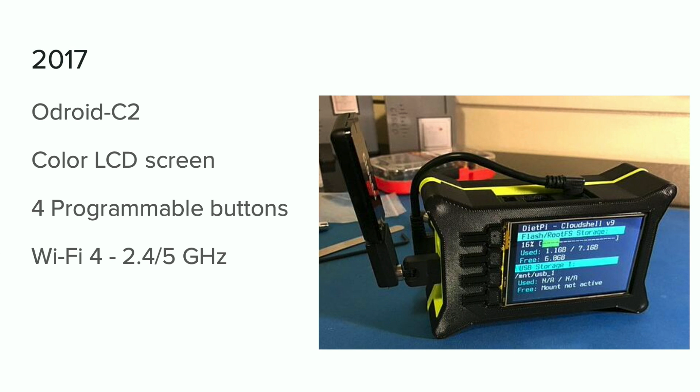So in 2017, we quickly realized not having a display was a big pain point for this type of tool. So we were able to take that same platform but now add a display to it, a colored display with some programmable buttons on there, still rocking the Wi-Fi 4.

And then we go on to 2018, and we move to this Neo 2 platform. Smaller platform, smaller package. Also added the OLED display, which was a nicer display to work with. And the big thing was we were able to add 802.11ac to it at that point.

And then 2019, still stayed on that Neo 2 platform, but evolved it a bit. Joel was able to put together this case design for it that allowed us to house the adapter, the cables, all that kind of stuff into a nice, easy package to travel with.

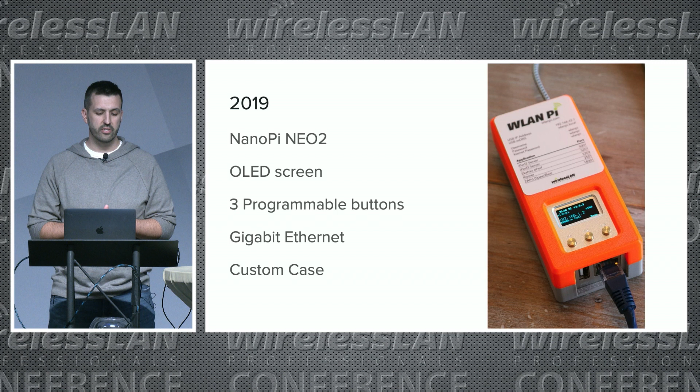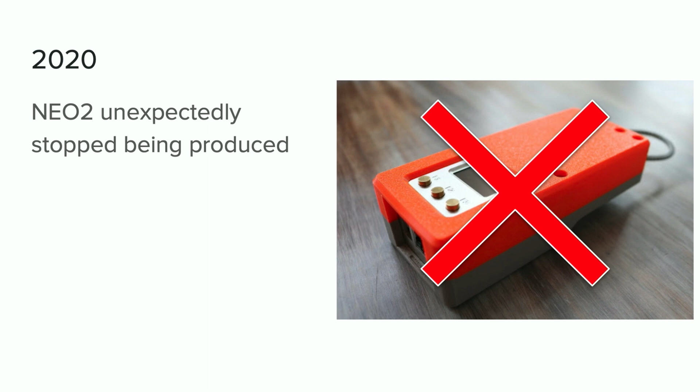Then unfortunately, unexpectedly in 2020, we planned to continue on with the Neo 2 platform, but they stopped producing that platform. And since we were basically just using off-the-shelf parts, that put a bit of a cramp in the project. We had to pivot at that point. We didn't really know, so we had to look at some different options. It was decision time.

So we explored a few different options. The first option: is this the end of the project? Do we close up shop here? It sounded pretty nice at the time, since it's been a lot of nights and weekends and things like that contributed to the project. So there was certainly an appeal to that, but I think that myself and the core contributors involved in this project wouldn't allow it.

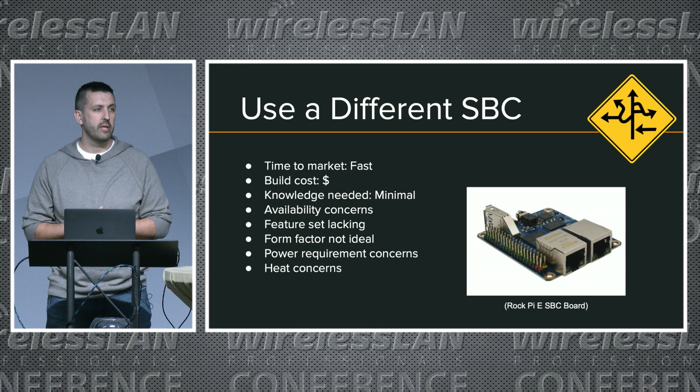They wanted to continue on. They were ready to face the next big task. So we looked at a bunch of different single board computers. I've got a pile of these things collecting at my house, as I'm sure a lot of you guys do. We looked pretty seriously at something like a Rock Pi E, and it met a lot of the requirements, but the concerns were a lot to do with availability. Is this just going to be another thing where we pivot to this, do all the development work to get an image on there, and then it just disappears on us?

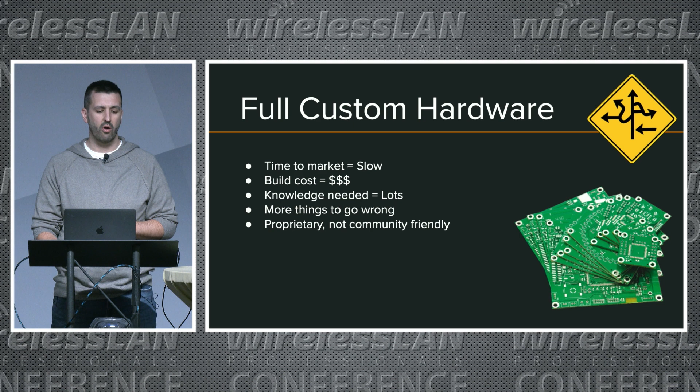So then we looked at full custom hardware. That certainly is appealing, it would give us the greatest amount of flexibility. However, there was a time constraint. Knowing things like WLPC, there was a demand for the previous generation hardware, so we wanted to try to get something to you guys as quickly as we could. Also there's a cost and complexity standpoint, things like that are all part of that. So we didn't end up going that route, but what we actually found in the process was a possible hybrid solution.

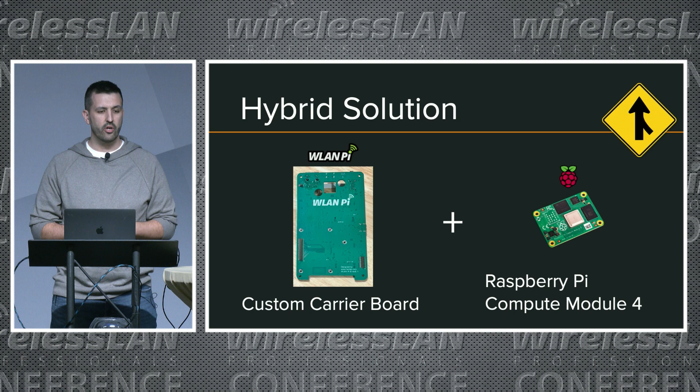I don't know how many of you guys are familiar with carrier boards. This was a new concept to me, but working with carrier boards was pretty interesting. Carrier boards bridge that gap where it allows us to build something much faster, in the sense that it takes a lot of the complex pieces of the components, your CPU, your memory, that whole architecture, and puts that into a single component - a compute module. So basically the brains of it is a standardized component, and then we're building the carrier board that mates with that pair together. So that allows us to lower that difficulty level of developing this, but also speeds things up from a time to market standpoint.

Since it's still custom manufacturing of circuit boards, there is still a significant cost and time associated with that, but at least it does lower the barrier compared to a full custom solution. The other thing that I really liked about the compute module side of it, the Raspberry Pi Compute Module 4, is that this is meant to be an industrial type solution that's going to be around a while. They actually have guaranteed that it's going to be in production until at least 2028. So that was also another big selling point to us - if we're going to embrace this, it's going to be around a while and we're not going to have to pivot to something else in a year or two.

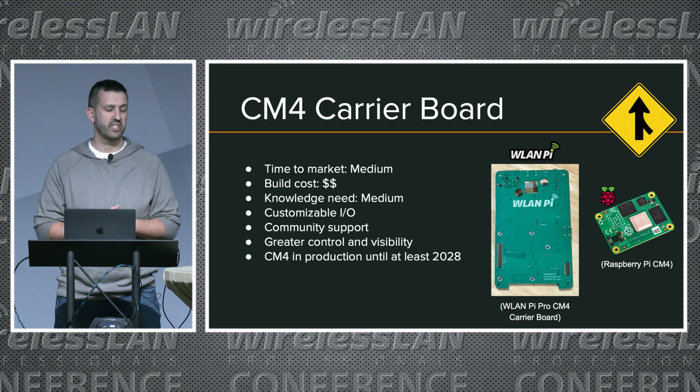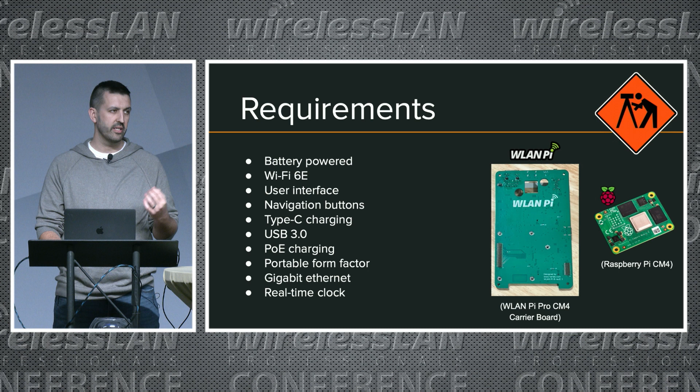So we laid out our requirements. We looked at the previous solution that had some shortcomings, and as technology was evolving, it was becoming more apparent - not having things like USB 3, not having any kind of PCIe, we couldn't utilize the latest technology that we needed for Wi-Fi professionals. It also didn't have a battery, so you had to connect external power to it, things like that. So these were the requirements that we came up with, and a lot of these came from conversations with users - oh, it'd be awesome if it had this. So we just compiled that list of what the users were asking for.

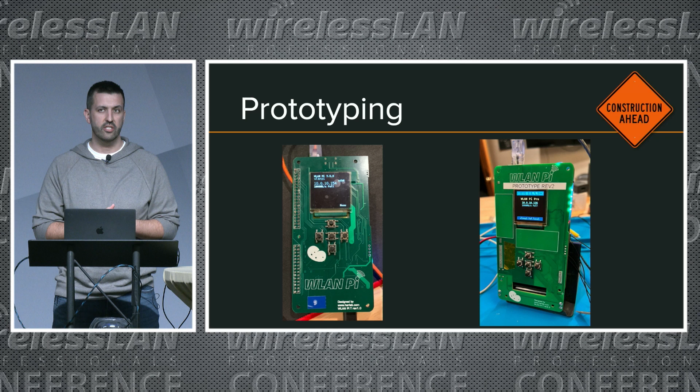So then the next phase was, after we defined those requirements, we moved on to creating some prototypes to see if we could actually create something that could potentially fill those requirements. So we went through a prototyping phase, then we went to production, and then we got into the fun of assembly. And this is what my office looked like just before WLPC. Thankfully, some hands that got in early also helped us assemble - you can see the picture on the right there. Those are the completed units for the deep dive that's going to be happening later today.

And fast forward one year later from the time when we decided at that decision point - okay, we need to do something here, we don't want to let this project die - one year later, this is what we came up with.

That's all you guys wanted to hear, right? We don't need to go into any details or anything.

So let's get into some of the geeky pieces of it. What are some of the features of the WLAN Pi Pro? Some of the features include using it as a packet capture device, network performance testing endpoint. It could become a portable DHCP, TFTP, SFTP server, Wi-Fi scanner sensor, portable AP. The list goes on - you can see there's a lot of different options there.

One thing I want to point out is the last point there, around being an open, non-proprietary platform. I think that's very unique to this project and something I really like, in the sense that we have a lot of awesome developers, even in the room here, that I've had the opportunity to work with. They don't have the ability to develop custom hardware like this, and for their specific tool it doesn't make sense for them to go out and do that. So I think it's really cool that we can develop hardware like this that enables these software developers to write some really cool apps for your phone, your laptop, web-based things like that can take advantage of this tool.

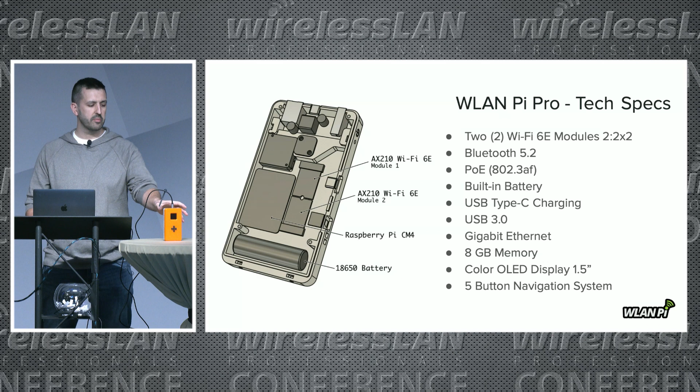Also with the Bluetooth, I could technically pull the cable out and just run it off battery as well. But yeah - USB 3.0, gigabit Ethernet, 8 gigs of RAM, color OLED display, twice the size display as the Neo 2 had, and we added some extra buttons versus the 3-button solution on the Neo 2.

You can see all the ports, the layout, and everything here. This is pretty much the same kind of view, but you can see from the side what that looks like as far as where everything's located.

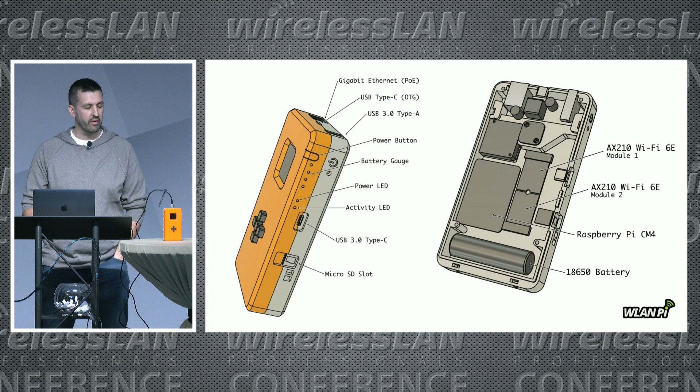So that brings us to - we've got the hardware we talked about, but we also had to change the software as well. This is a completely different platform than we were on; it's a big shift from the Armbian-based solution we were using before with the Neo 2. Now we're putting in a Raspberry Pi Compute Module 4, and the cool thing is that by moving to this method we've now separated out our hardware, WLAN Pi Pro, from our software, WLAN Pi OS. WLAN Pi OS is built on Raspberry Pi OS.

If you're familiar with Raspberry Pi OS, we've essentially built our tool set on top of it. That means if you're already using Raspberry Pi OS in your environments, you know what packages and things are available - all those same packages are available to you now on this platform as well, in addition to all of our custom tooling. It's an open source platform, community supported, and compatible with all your existing Raspberry Pi hardware you probably already own - Raspberry Pi 4, Raspberry Pi 3.

Basically, as long as it supports running a 64-bit operating system, you'll be able to run the WLAN Pi OS on that same hardware. So there's still the DIY component to this, right?

That leads us to the Community Edition, which allows you to still do that DIY part of it. So I've highlighted in the bullet point list some of the differences between the WLAN Pi Pro and what its capabilities are out of the box versus if you're standing up a Raspberry Pi 4. You can see what functionality you'll have and what you won't have if you're running the Community Edition, as we're calling it.

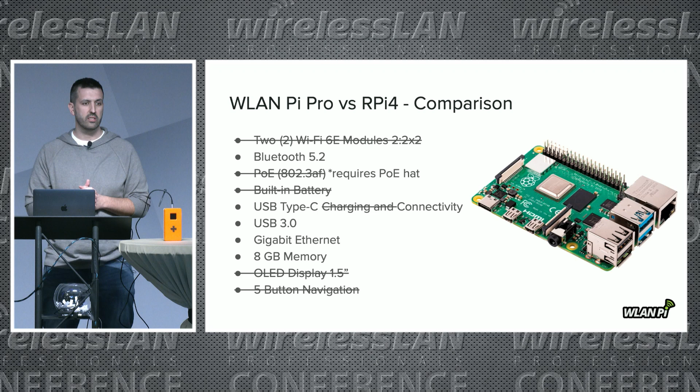So if we continue on that path of comparison, you can see hardware-wise some of the differences of what's included in the WLAN Pi Pro versus the Raspberry Pi 4. The ones that I've crossed out there aren't going to be available either at all, or at least out of the box, on a Raspberry Pi 4 that are already built into your WLAN Pi Pro. And of course, we've got some new tools in the process as well.

I want to highlight again this open, non-proprietary platform that allows developers to write their code to run on the WLAN Pi and take advantage of all the hardware that we packed into here. Some vendors have already created tools, or are in the process of developing tools, that are going to take advantage of that technology.

We put a new dashboard, rewrote the whole front end. Josh put a huge effort into this and has done some amazing work on rewriting this front end. It's built on this extensible framework using Flask.

We also have an admin interface that we've added using the Cockpit project, which allows you to put a web-based admin system on there. One thing that's really slick about this is if you have a bunch of WLAN Pis, you can log into a single Cockpit instance and add all of your WLAN Pis to it, so you can manage all of them from a single dashboard.

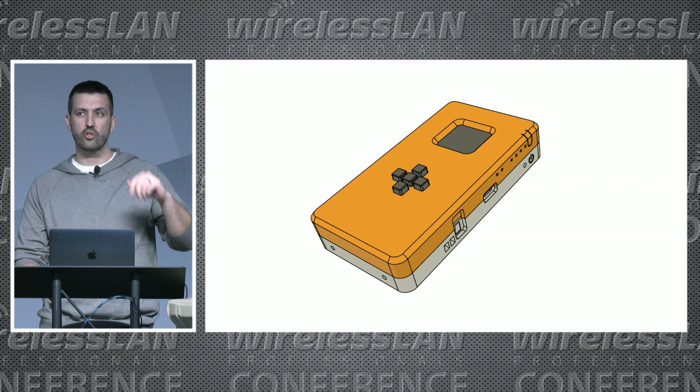Question over here? Profiler is not available on 6 yet. I'm not sure yet if we're going to be able to. 6 gigahertz has some extra restrictions at this point, at least with transmission and that kind of stuff, that we're not able to overcome. However, we're hopeful that we can, at least through profiling a device on 5 gigahertz, be able to get it to tell us information about its 6 gigahertz capabilities as well. We can still use Profiler to do 6 gigahertz association captures and parse out that information. If you had, let's say, a 6 gigahertz AP, you could capture that association request that the client would send to the AP. We can put the Profiler in that mode as well to just capture all association requests or to capture for a specific SSID.

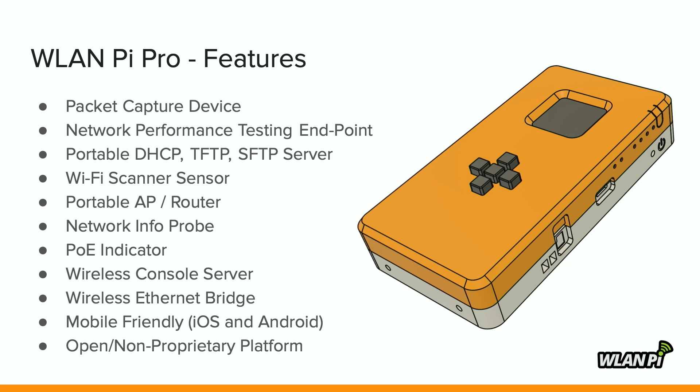Sure. Go back. You wanted the features, this one? This feature list or the hardware? And this was the tech specs.

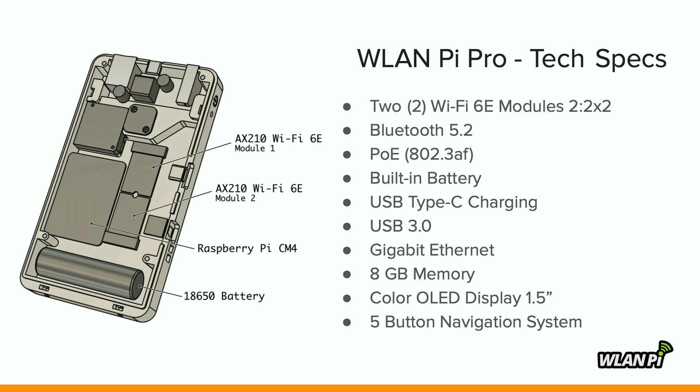Mobile friendly. So the question was, what do I mean by mobile friendly? With the previous WLAN Pi, we couldn't connect it to an iPhone. The problem was the power it required, and that was one of the benefits of putting the battery in there. Now that the device has its own power source, we can connect it directly into an iPhone, either over USB or over Bluetooth.

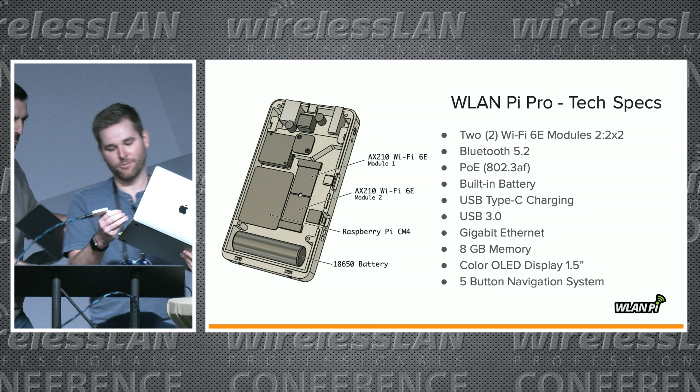All right, well, Joel has some stuff to share on the case design side of it with Nick as well. I just tagged along. It's fine, Nick's here for moral support. No, Nick was a big contributor to this, so he definitely has a lot to talk about. We collaborated heavily on this design. Thanks, Jerry, thank you. All right, while Nick is getting all that squared away, sorry for the delay.

My name is Joel, this is Nick, and we collaborated in designing the case. At the end of the day, for the actual design that got printed, I probably pushed the buttons that made the design, but Nick was super involved in feedback and testing designs, and he also printed about half of the cases, so it was really nice to double our efforts. Working on a team is great to resolve problems, so super duper valuable.

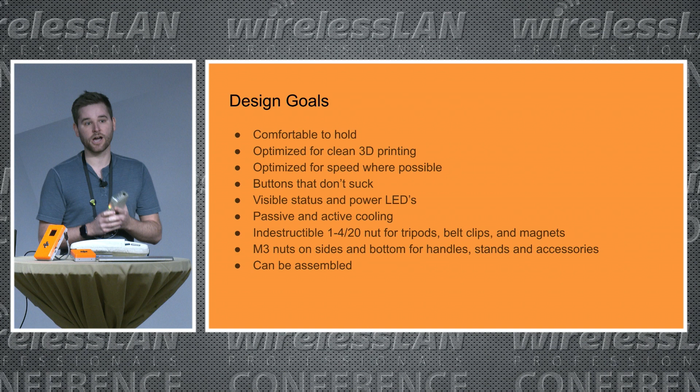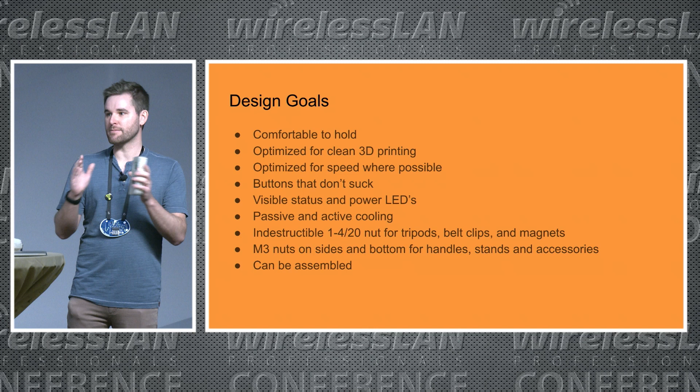Just like Jerry talked about requirements, we had some requirements for the case. One is we wanted it comfortable to hold, feel good in the hand, since we see it as a handheld tool. We also wanted it optimized for 3D printing, since we needed to print tons of these things as fast as possible. There are certain design ideas and parts that are easy to print and others that just don't print well. Every manufacturing type has a certain set of limitations you have to operate in, and 3D printing is no exception. We also wanted to optimize it to be fast to print, to get this thing printed as quickly as possible.

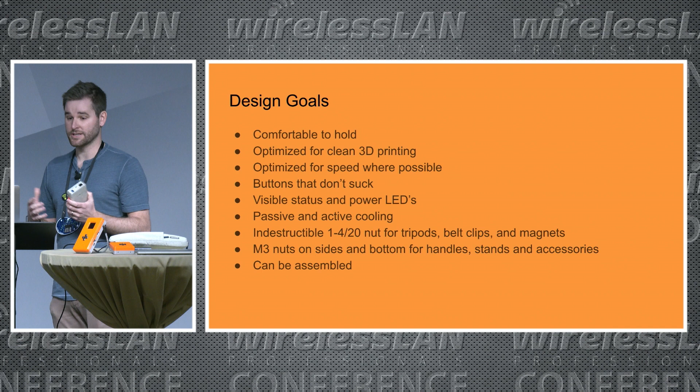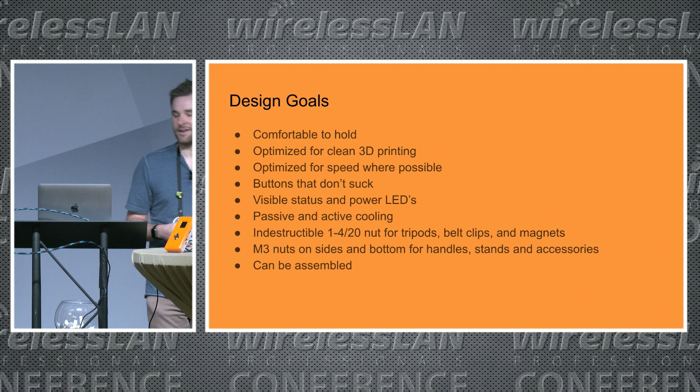Nick, how long ago did we start actually printing production cases? Well, as hinted by Jerry, with the hardware, we didn't get hold of final production hardware until January, early-mid January. I got a sample, you got a sample, and that's what we had. That really bit us down the road because we found out there's some variance and tolerances, like the height of the buttons was different on a bunch of the production units. Oh man, there's all kinds of stuff like that we learned along the way.

Another requirement, speaking of buttons, is we wanted buttons that didn't suck. This was one of the hardest things to do, especially with 3D printing, because it's not very exact. We also got locked in early on our button design because we had to tell our hardware supplier what kind of buttons we wanted, and we found out pretty late in the game that we chose poorly—or rather, there was wiggle room for improvement. Wow, man, you should go into marketing or something.

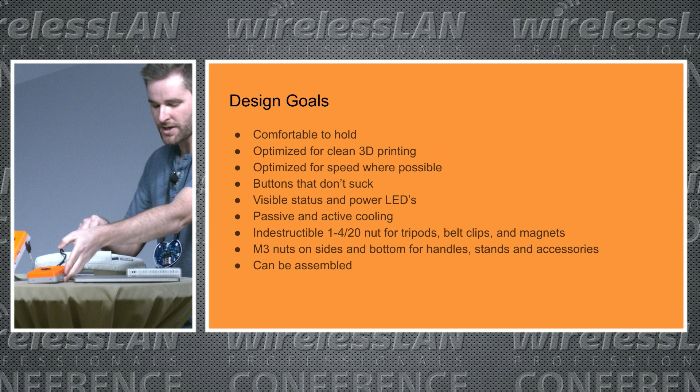Also, we wanted visible status and power LEDs, so there's a heartbeat and a power indicator. These come directly from the Raspberry Pi. There are also battery indicators along here—you can see on Jerry's unit, the battery indicators are kind of glowing. From a distance it looks like it's on fire. It's really nice. There's also an LED above the PoE or Ethernet port, so if you plug PoE in, you get a nice indicator showing you've got power from PoE. So that's nice.

We also had to do cooling. This thing generates some heat - it's got a Raspberry Pi 4 compute module inside, so there's going to be some heat involved. Also the PoE circuitry generates quite a bit of heat. So we added cooling vents and things like that to meet those requirements.

Also, this is a big one, and Nick, you pushed pretty hard for this, as did Jerry. Do you want to talk about the thing that you wanted? Oh, the mounting. Yeah, which one was it again? It was right here. Okay, yeah.

One of the strict requirements from Jerry was that it must have a 1/4-inch thread. We later discovered that the original WLAN Pi case, in the M3 bolt recesses, Jerry had managed to crank a 1/4-inch into those. So accidentally, the V1 design actually would house a 1/4-inch accessory - but it could only do it one time for each unit.

So the requirement for this case was it must have a 1/4-inch thread somewhere on it. And of course, we're all collaborating on this, trying to work to timelines, and decisions get made, and then Joel is stuck with the question of where do we put it on the case, because it's not smack you in the face obvious.

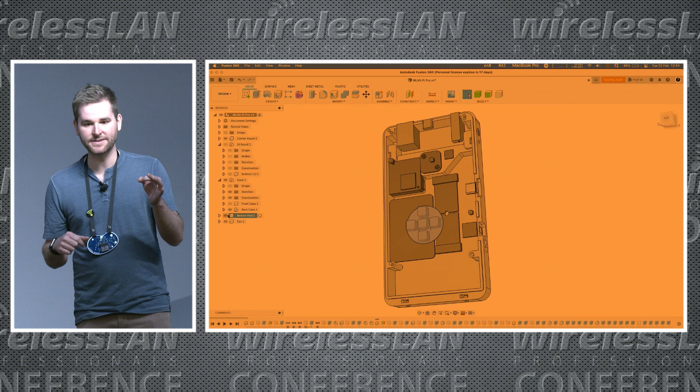Do you want to just show where the nut is in there? So what we did is these are just off-the-shelf 1/4-20 nuts - I apologize if they're 1/4-20, I wish we could have done everything metric, but the standard is imperial for this. So basically what we did is we did a recess inside the case that the nut press fits into.

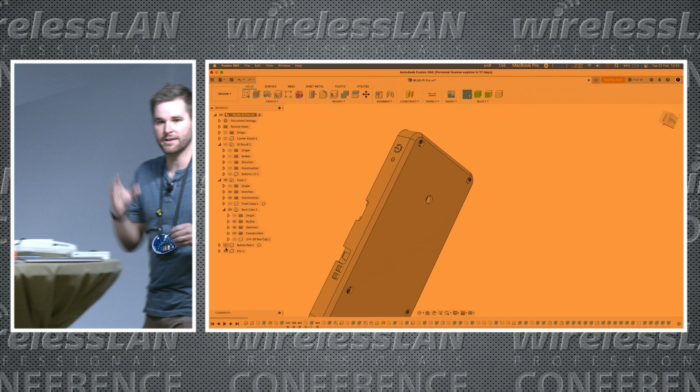One of the requirements was I wanted this to be indestructible - I wanted you to be able to tear the case apart before the nut or where the nut sits fails. Additionally, as you tighten up like a tripod or a belt clip, Jerry's got one - that's where the nut is, and he's got what looks like a holster accessory on here. As you tighten that up, it pulls the nut against the back of the case, so you really can go as tight as you want. It really should not fail unless you stick an impact driver on it or something like that.

Then it might fail, I don't know. Please don't try, I don't want to print another one for you. I guess you could - I probably would print another one for you, actually.

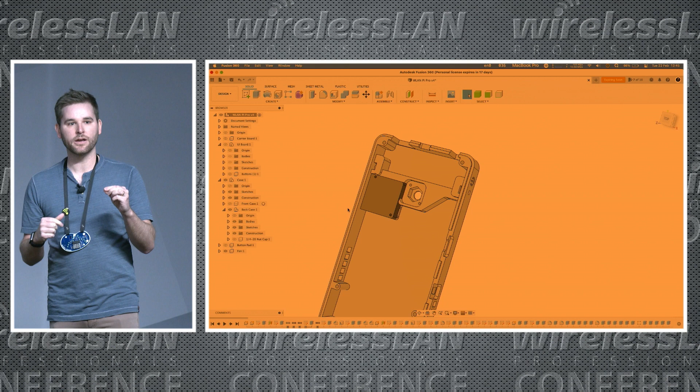Another challenge we ran into is how do you capture the nut in there? One thing you can do with 3D printing is print up to a certain height and tell the printer to pause, and it moves the print head out of the way. Then you can put the part in there - a nut, a magnet, whatever - and tell the printer to start running again, and it goes back over and fills in on top, trapping it inside. The problem is now you start a print, wait 2 hours, the printer starts beeping at you at 1 a.m., and you have to go in, put the nut in, hit print, make sure everything's good again. We didn't want to mess with that.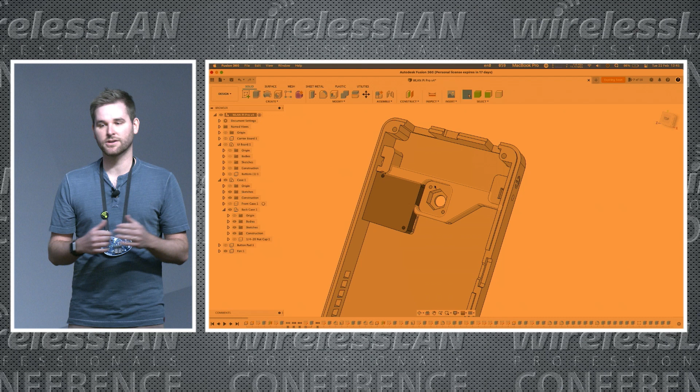So what we decided to do is build this spot where the nut would press fit in, and then there's a cap that goes on top with 2 little M2 screws that go in on each side to hold it together.

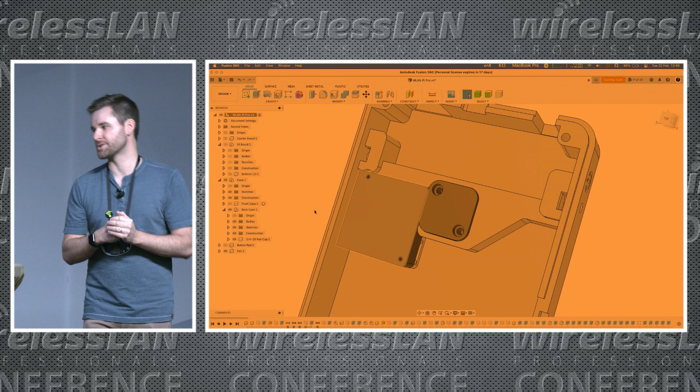I don't think it's going anywhere. I don't think you're going to be able to break it. I don't know, it really should be super duper strong. So, but that enabled us to also...

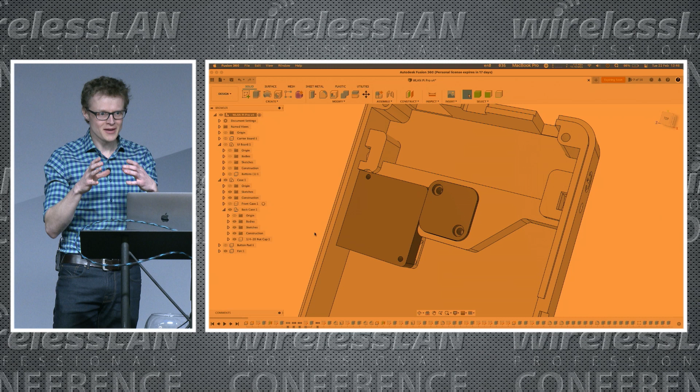The tolerance here, it's not correct that the nut should rattle inside this housing. We were unable to guarantee that we would get the same 1/4-inch nuts. Even in the UK they do sell 1/4-inch threads, but instead of risking that, we just printed these ones out, and Joel was able to supply us with the 1/4-20 nuts, American made, well, probably not American made.

So could we go back to the slides? Yes, I don't know how the gesture to get back to it. Okay, rad, oh, and let's go to materials.

Okay, so we had to decide which material to use. We basically have two options, we can go with either PLA or PETG. Some people call it PETG. There's some pros and cons to each one, but here are the highlights.

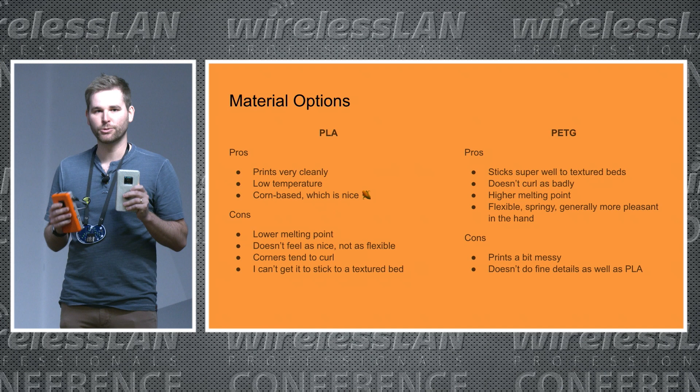PLA prints cleaner, this is PLA. It's a special edition I made just for me, with a broken screen by the way, that's kind of fun. Some of the screens, unfortunately, had a couple of bad screens in the factory, and I managed to receive one of those. PLA prints really clean, very sharp, the layers stack up really nice, it just looks really good. But the problem is it feels kind of tough, it doesn't feel springy, it feels a bit more rough in the hand.

So we decided to go with PETG instead. Another thing I like about PETG is it stands up to heat better. You can leave this in a hot car - I mean, I wouldn't do it because of the battery in there, I try not to leave stuff in a car on a hot day - but if you did accidentally leave it in a pretty hot environment, it's not going to deform or warp, whereas PLA absolutely can, and I've seen it happen multiple times. You really have to use PETG in circumstances like that.

Additionally, when you're printing a part, adhesion to the bed is really important. As the part cools it tends to contract and warp up. In fact, if you look very closely, every now and then you might see a little corner where it peeled up just a teeny tiny bit - it's just a side effect of printing. PETG doesn't suffer from that like PLA does. Last thing that's nice about PETG is you get that nice textured surface, I think everybody enjoys that look, and that's part of why we went with PETG.

I think it's important to talk about what we used to model this up. For the last WLAN Pi case, I used a tool called SketchUp, a Google project that got spun out into Trimble or something like that. The problem with that tool is that it's what's known as a surface modeler, designed for making a surface of polygons. That does not work well for 3D printing, and it also doesn't have any kind of parameter control.

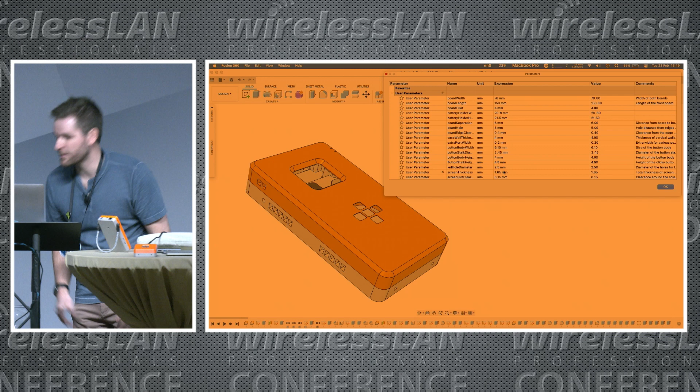What parametric means is you build the model with parameters. You say, okay, here's an object, I'm going to go out from that object by 10 millimeters - you've done it with a parameter. What's great about that is if you define a tolerance around a part, an empty space, something like that, it's a matter of going in and saying, change that from 1 millimeter to 2 millimeters, and the part just changes. So let's change the board length - let's say the WLAN Pi board was not 150 millimeters long, but 200 millimeters long. I just changed the parameter, and now Nick's MacBook is working super hard to do a whole bunch of math, and now we have a super long Pi.

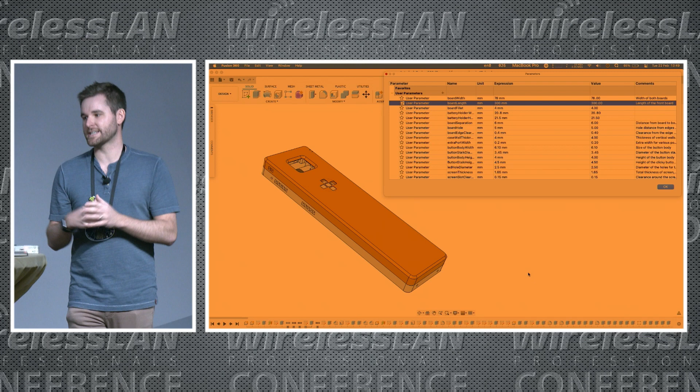While that is a goofy example, this is super powerful because it allows us to go in and make small incremental changes and tune the size and all kinds of different things in regards to the model. So I think we can go back to slides.

Did you not have 3-finger? Is that all right? I think it's kind of cool. I think we should keep it.

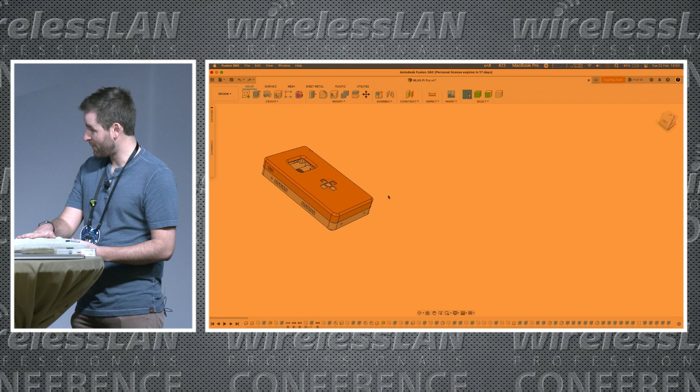Now, while you're doing that, I think I'll introduce the other WLAN Pi. We've just got a reveal. So, Jerry's WLAN Pi, this is pretty cool, but sometimes I think we should think bigger, right? And so what we decided to do is make one that is literally bigger. I'd like to introduce to you the WLAN Pi Pro Max.

All the work that we did on the case, that's what got applause. That's what worked. So, all right, good to know. Okay.

Should we go through... I think that's enough on the things that we did. Let's talk about the case and how it goes together. Yeah, you mind if I just take Fusion and do that?

Okay. My dock's on the left. Oh, it's on the left. Yeah, ooh, and they're tiny. Okay, all right, let's see if I can figure out all of Nick's settings and things for Fusion.

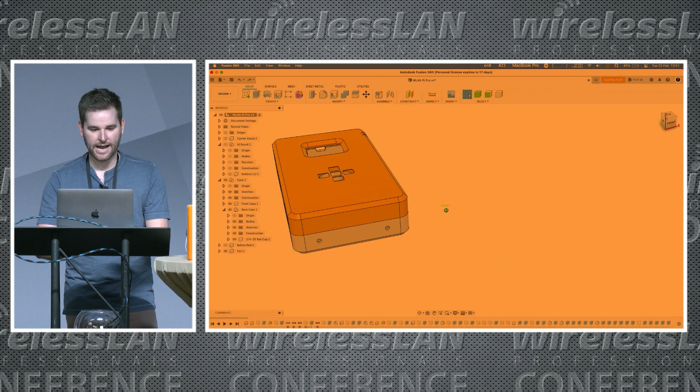Okay, so just real quick, I want to show you sort of how this case goes together. So basically what we did is, this is your fancy one, Nick. This isn't the basic one, this is the fancy one.

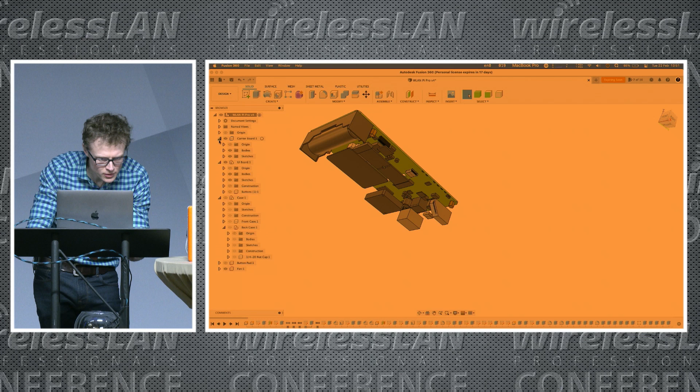One thing I was going to show you is a different way that I modeled this up. Last time when I made the last WLAN Pi case, I kind of built the case around a ghost. I said, okay, the WLAN Pi is this wide, this long, the Wi-Fi adapter is this wide, this long. I didn't actually model up the WLAN Pi, the adapters, the cables, all the things that go around it. This time, I actually modeled up the board. So I said, here's the board, here's where the connector is, here's where the USB connectors are, here's where the battery goes, here's where the screen is, here's where the buttons go.

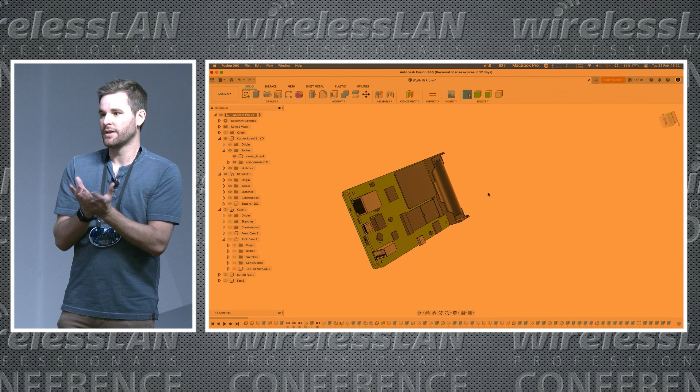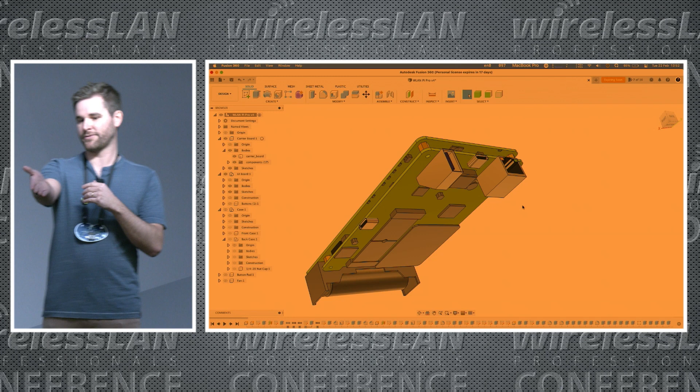And so I created this model and then built the WLAN Pi around it. Now this is very deceptive because the model you're looking at now is from Nick. Mine is a bunch of squares, it looks worse than Star Fox on a Super Nintendo, just a bunch of cubes. That's basically it. Nick was on the plane and decided to model the whole thing and beautiful ports. As Ian Toll discovered as he walked up the aisle, there was this guy handling a bare PCB on the airplane with calipers out, measuring how big's this component, how tall is this one. And this is the end result of that.

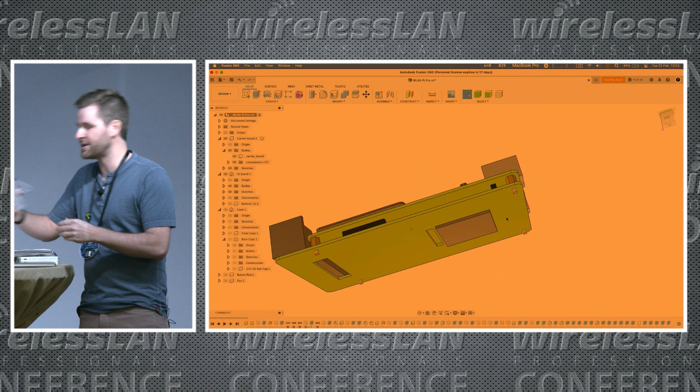So this has actually been really nice because now Nick can produce us full, beautiful renders. Of course, he was able to do renders of the outside of the case and some of the inside stuff, but now we have beautiful renders of everything, including the pins. Look at the pins inside the Ethernet jack, inside the USB-C jack there. Isn't that nice? Oh, it's so nice.

So now, oh yeah, extreme close-up, right? Can you turn on the back and the front? I don't know, let's just turn on a couple of different things.

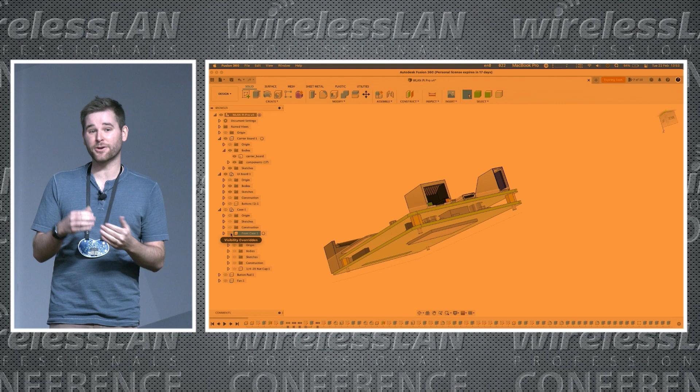And this is also another huge advantage of Fusion 360, is we can create components. So we have a front board, which is a component. We have a back board that's a component. We can turn those on and off. We can reference those components in other components, and it's really nice. So if you don't mind, can you hide the back board and just show the front board inside the case?

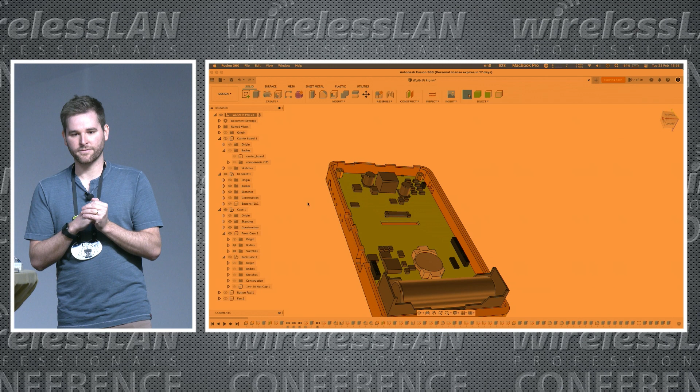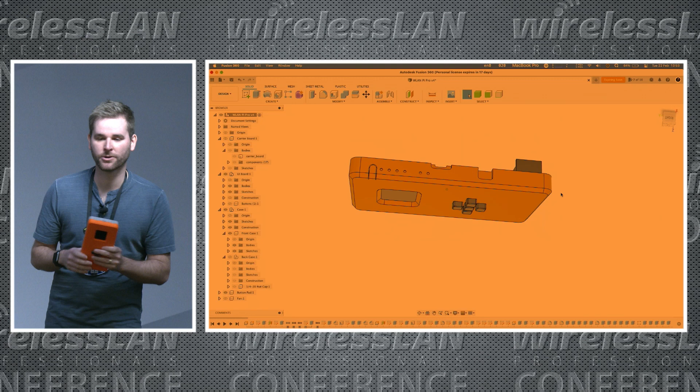Another thing we had to think about as we're putting together the WLAN Pi is how does it go together. You have to build something with assembly in mind, and oh boy, did we learn some lessons, especially last night watching everybody struggle through putting these things together. It's funny how building one is so easy, but building 80 is a nightmare. That repetitive task over and over really made the difficult parts of the assembly stick out.

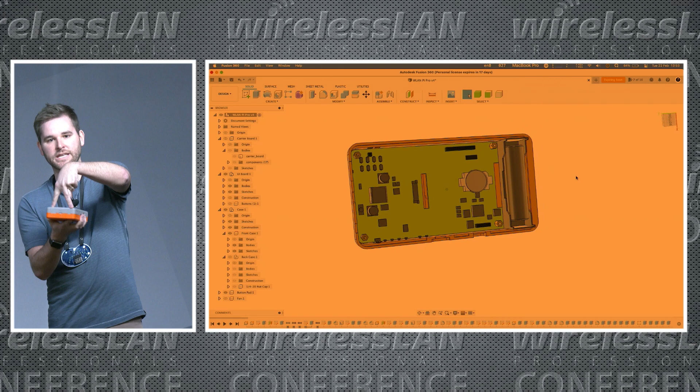The way we designed it, you have the orange front, and then the front board with the screen goes down in there, and you have 4 standoffs on each corner that hold the front board down. So that's all very simple. Then we bring in the backboard, which has a couple of interconnects, some pin headers basically, and it just kind of sandwiches down on there. So now you can see that Nick has added that.

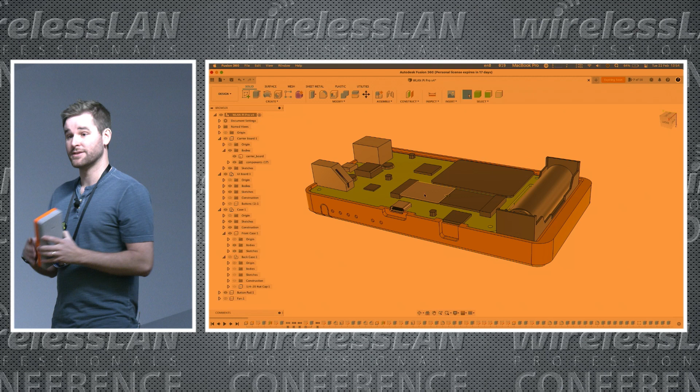This is when we connect all the antennas to the Intel AX210s, and connect the fan, there's a little fan and things back there. You can see Nick pointing at the AX210s. Then the last step is to take our back piece and stick it on, and 4 Phillips screws kind of sandwich the whole thing together.

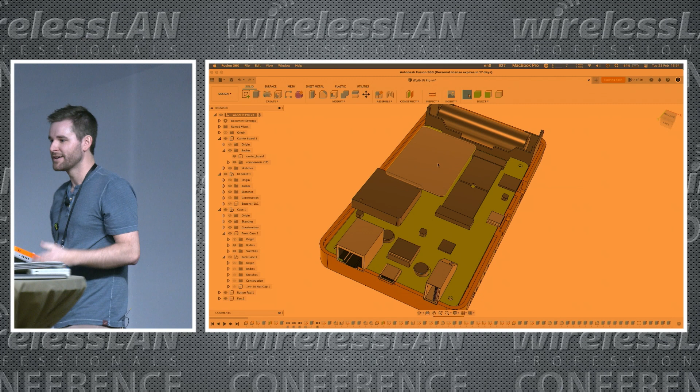Oh, and the CM4 needs to go in there too. That's kind of important, you kind of want to have the compute module in there, it kind of brains the operation. Yeah, there it is right there. And so there's the back case all on there, and that's how the whole thing goes together.

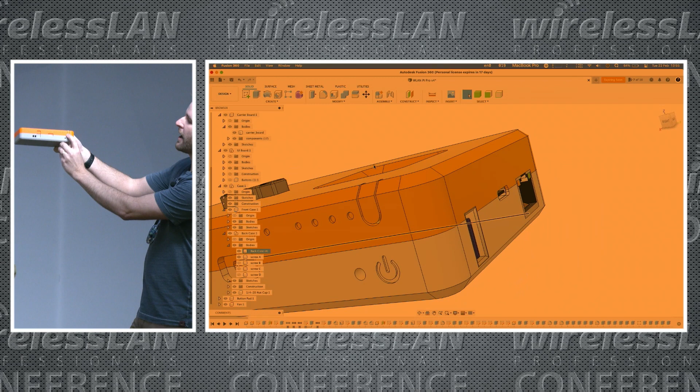Now we are going to be making some changes, probably incremental changes as time goes. There's a few things we did that, looking back, I'm like, why did we do it that way? For example, the power button, it would be really nice to have a larger version up here. We have a power button right here, a flexible thing you press on the side, and that's what powers it on. And then you have status LEDs right there.

Wish I hadn't put the LEDs so close to each other. Looking at that now, it would have been really nice to maybe put a bigger button there, but we kind of had to keep things small because of that. So we might make some minor adjustments, move things around a little bit in the next revision, and that's the beauty of 3D printing. We're not committed to an injection mold or anything like that, which is really nice for prototyping stuff like this.

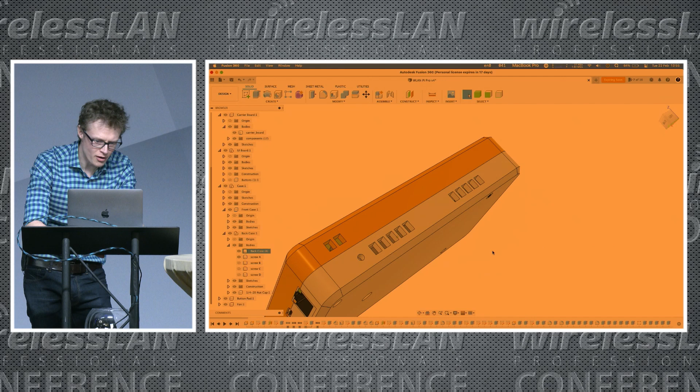Nick, is there anything else in the design? I'll just jump in and talk about the M3 nuts super quick. On the sides, next to this power glyph, there are holes, and there's also another couple of holes on the base of the unit as well. Inside here we've housed M3 nuts, and the idea is to open up things that you can bolt onto the WLAN Pi.

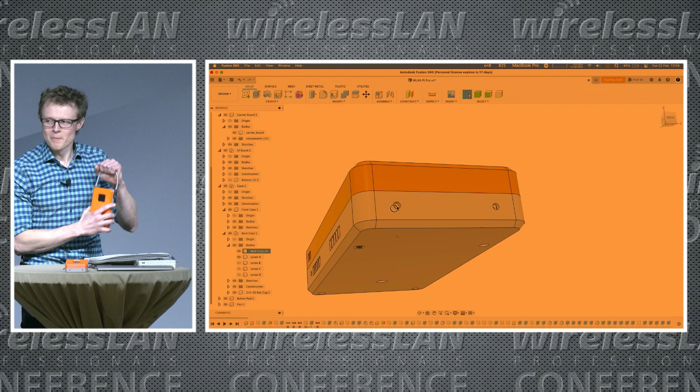So for example, on this one, I've turned it into a man bag. A man bag, nice work. But also, critically, a stand. For your man bag. For the man bag.

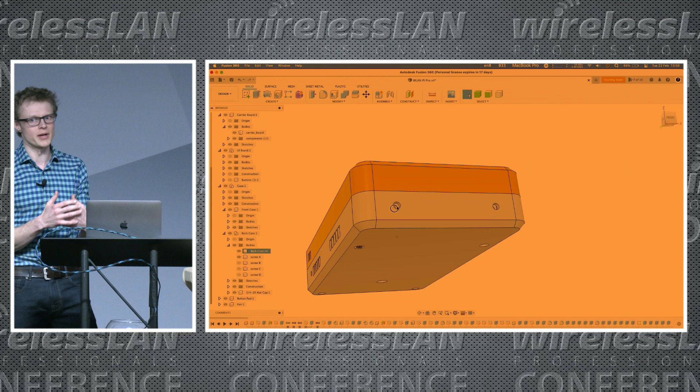The idea here, we haven't done this yet, but we will publish the dimensions of the spacing between these nuts and the depth, so that anybody else who wishes to build things to clamp onto their WLAN Pi can do so.

So where's Jake? Jake really wanted a loop. Is he somewhere here? There he is. You really wanted a loop on here? There you go, you can have a loop. I'm also thinking a desk stand would be really nice.

Stuff that I would have liked to have done, but we just didn't have time. We'll publish these numbers, how deep the screws can go, things like that, so that you can model your own stuff for it.

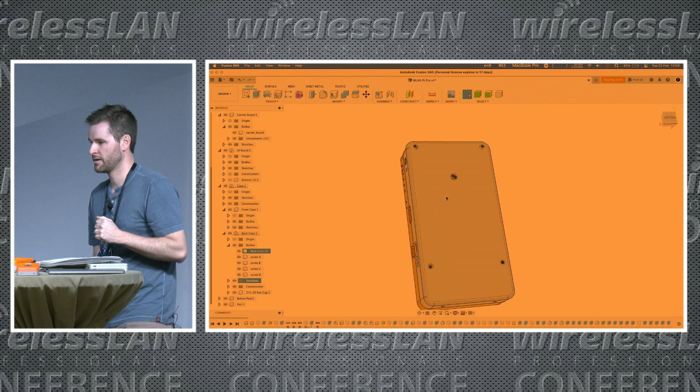Did you see it's even got the bolts in here? Wow, look at that. But, oh, something bad happened. Yours should not look like this. If your WLAN Pi comes out looking like this, come talk to us. Yep, come talk to us.

So we should probably talk about printing a little bit before we wrap it up. Nick and I basically had 2 weeks to print a whole bunch of these things. I think we'll get there. I'll talk about my setup really quick, and then Nick will talk about his. I printed all of mine with 2 Prusa Mark III S printers and 2 Prusa Mini printers.

I bought one printer from Fernay, and Keith brought it up to Boise for me, so I could increase my print capacity. So thank you, Keith. Thank you, Fernay.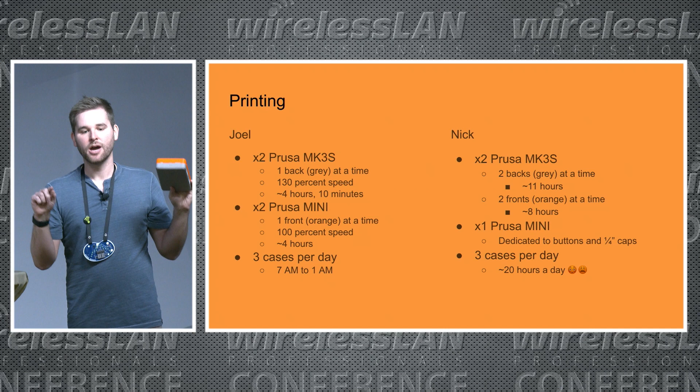What I did is I printed the gray backs one at a time. These took about 4 hours and 10 minutes, and I used mostly default settings when I sliced it. But on the printer, I cranked the speed up to 130%.

The back took a lot longer than the front. The fronts I printed on the Prusa Minis, and these took about 4 hours each, and I just printed one at a time. I found that if I tried to print 2 at a time, I'd get some curling, some warping, so I just decided to stick with one at a time.

I ran my printers from about 7 a.m., and they usually finished the last print job of the day at about 1 a.m., something like that. My wife is extremely patient, she didn't complain, she never does. Last time she printed a bunch of the cases herself while I was traveling, actually.

This is the print setup. I have a temporary one and a permanent one. The Mark III S's are on a couple of IKEA Lack tables in my closet, in my office, and they just live there. The Prusa Minis got put on a bench in the laundry room next to the window. You've got to keep the printers happy, light, plants, happy printers, make nice prints.

The UK production house is inside a wardrobe, and you can see there are 2 Mark III S's here, and they were cranking out two oranges and 2 grays at a time.

They were running almost 24 hours a day, but it's great that WLPC is here now because they don't have to run 24 hours a day. No longer will the house be noisy at night.

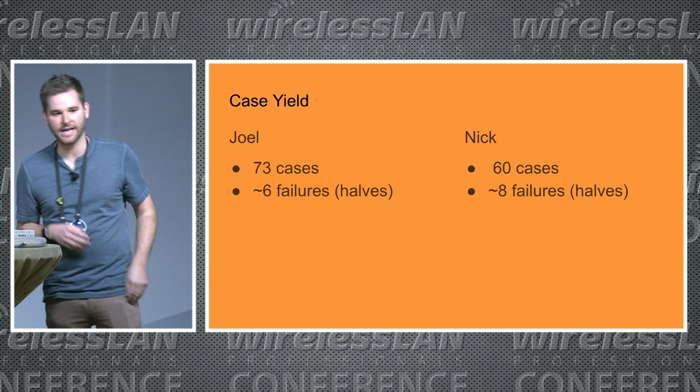Nick, how did you fare? Not too bad, I think I delivered 60 cases in the end. One part of the case is extremely thin, and on removal of those from the print bed, I cracked quite a few. Joel actually repaired one of yours, but I rage quit mine and snapped the cases. Once I broke that bit, we were done.

I'm sure it was very, very satisfying. Oh, it was very satisfying.

Real fast, biggest challenges, really quick: time to get the design done was the biggest thing, because we didn't get production units until weeks before the conference. Printing takes so much time, and that was a huge challenge.

Keeping the case thin. I was trying to remember the percentage, how much thinner this is than the previous WLAN Pi case. We did work it out, how many percent thinner this one is. This is the thinnest WLAN Pi we have ever made.

Thank you. That is the only Tim Cook impersonation I will do today.

It's something like 4%, 5% thinner than the old WLAN Pi, so it's technically thinner. That was a huge challenge. There's just a lot of really close tolerances that we had to hit to keep things thin. So yeah, we did that.

Also, just the consistency in printed parts is tough. Parts that I print in Idaho versus parts that Nick is printing on the other side of the world, you just get different tolerances because 3D printing is not exact. It just isn't. But I think it served us very well in this case, and I'm super thankful to have had it as a tool to get this done.